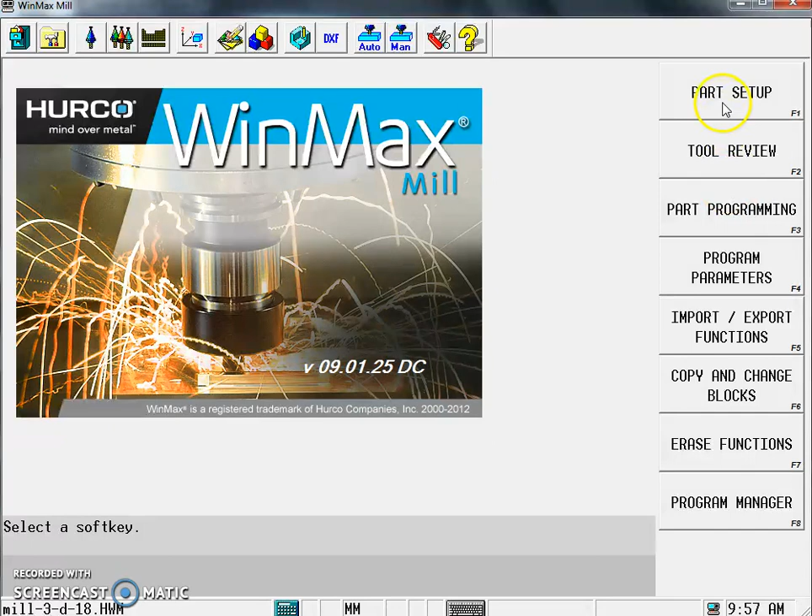Into WinMax, and first thing we do is on the input screen we can set up the stock material. So part setup, more, stock geometry, manual sizing, yes. The length of the box is 135, the Y is 70, and the Z is 40.

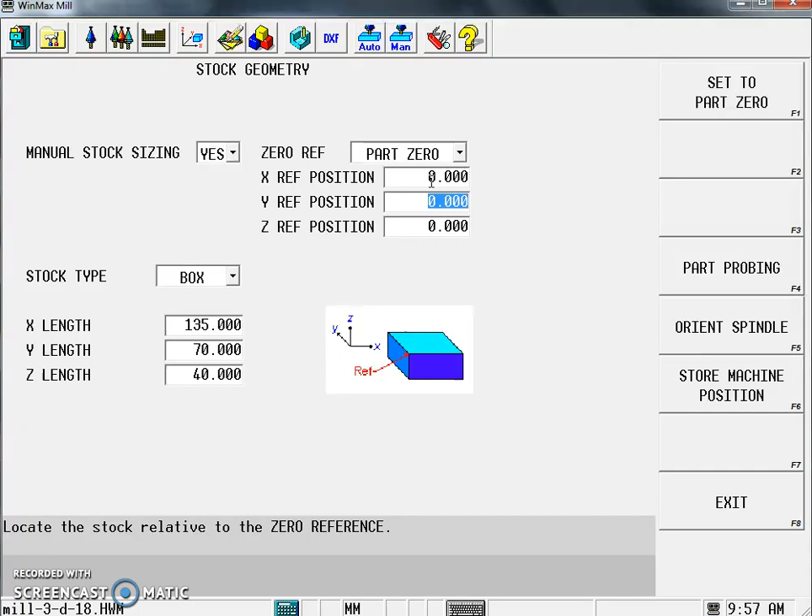So 0 editing there, minus 70, and for the Z position we're going to push that up to 32. Now we can just do a quick draw to check and see is the component stock correct. So that's the geometry there that we want for the stock.

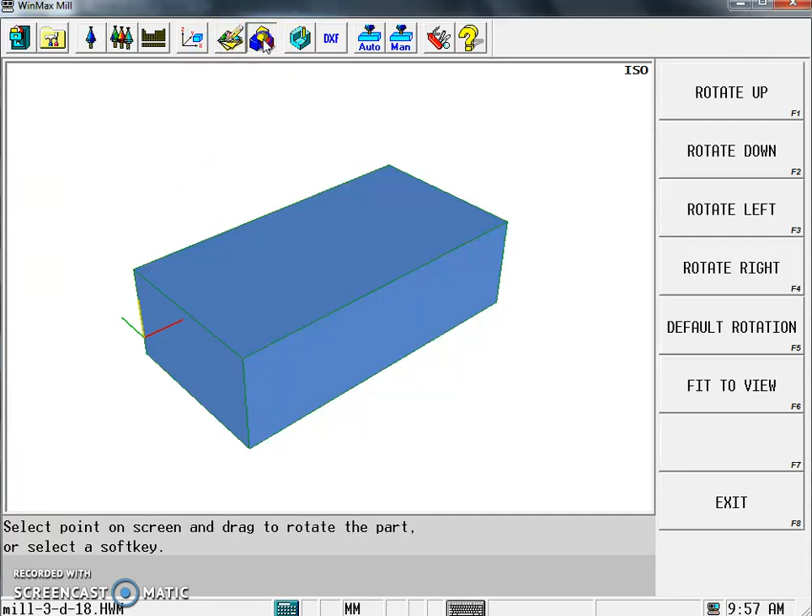Straight into the data blocks, our input screen, part programming, milling, and this time it's lines and arcs. Now our start point here, we need to take a look at our drawing. We're going to create a center point here in the part. This is our 0, 0 up in this area here, and we want to set a reference point in here, which will allow us to confirm this as the start point. Drawing this line, this clockwise arc, this line, and finishing with this clockwise arc.

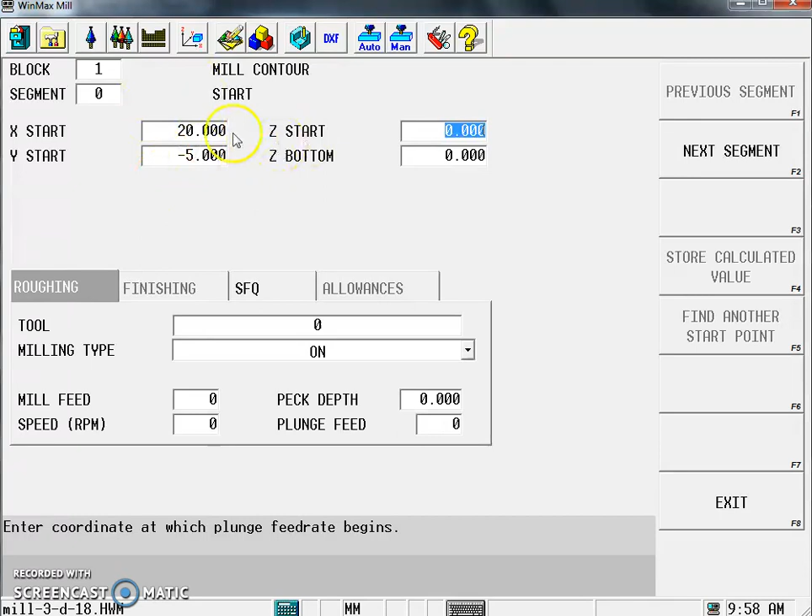So our start point from that, we'll go through it in class, but basically it's 20 minus 5, and that'll differ for different people. Our start point here is basically 30, and our start point is actually 31, and our bottom is 1.

The tool we're going to use here is an end mill, something like a diameter 16 end mill, and it's going to be a profile left. We'll go through the offsets later on and enable them. So that's our start point, that point there would equate to this corner point here. We worked this out in class, and we've given the center point here that we know.

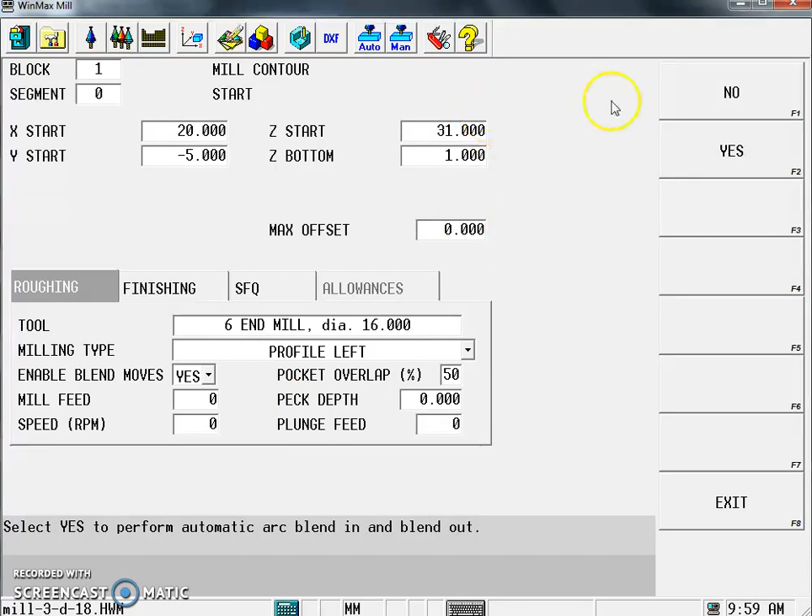Moving on, our next segment: we define a line. The X end of the line, this is our start here, our X end is basically 100 millimeters in addition to that. Where I get to 100 millimeters is the length of the bottom line here, 100 millimeters. So 120, and the Y is static. You see it calculates the length at 100 and the angle is 0, so a line straight across is 0.

We'll go on to our next segment, this time it's an arc. Our X end is basically the same as our X start, it's 120. Our Y end would be the Y start working way down. If we look at that, there's our start point of the arc, end point. We can see the block itself is 50 millimeters in depth, so it would be minus 5 plus 50, which is minus 55.

I'm going to leave the X center and Y center blank, type in 30 for the radius, and WinMax will calculate the rest. I know minus 30 is correct, so I'm happy with that, and the sweep angle is 112, which looks right. There are multiple center points, and we can click here to change that.

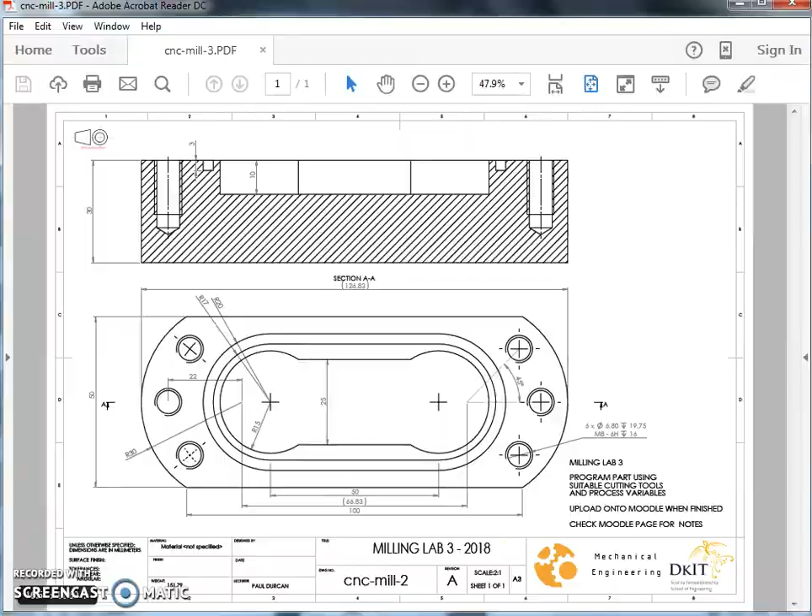If I go into my next segment, it's this line across the bottom, and because it's working back the way, we're working back to 20 millimeters. Our Y end there, I'm going to minus 55 - it should be the same as the Y start. We can see the line's 100 long and 180 degrees, which matches our drawing. 180 degrees is going in this direction and 100 millimeters long.

Our next segment is going to be an arc, same as before. This X end is the very start that we're at, and same with the Y. We leave the center blank this time because we don't definitely know them. We know the radius, and there's a similar sweep angle again.

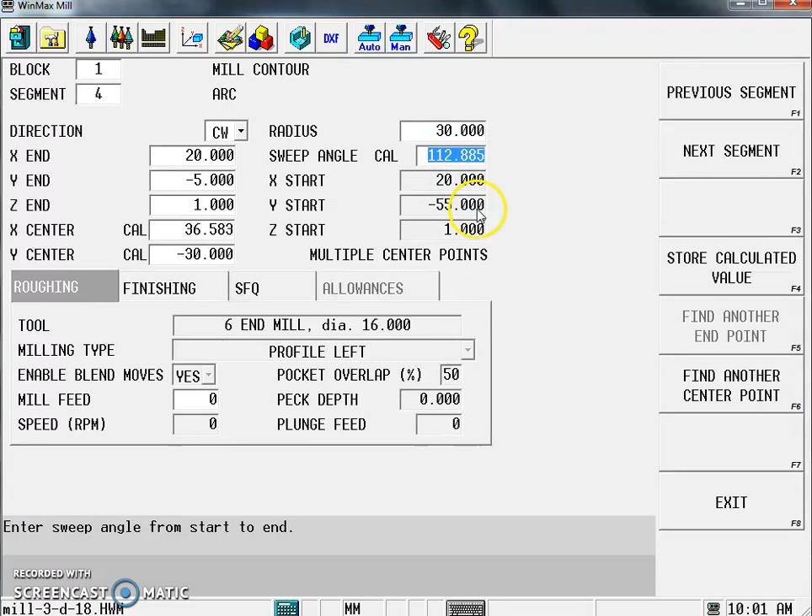So we can double check now. If we look at the blocks, we've done our line, arc, and if we just do our draw command, draw and draw, that looks okay. Let's rotate it and have a look. Okay, so that's not too bad in material.

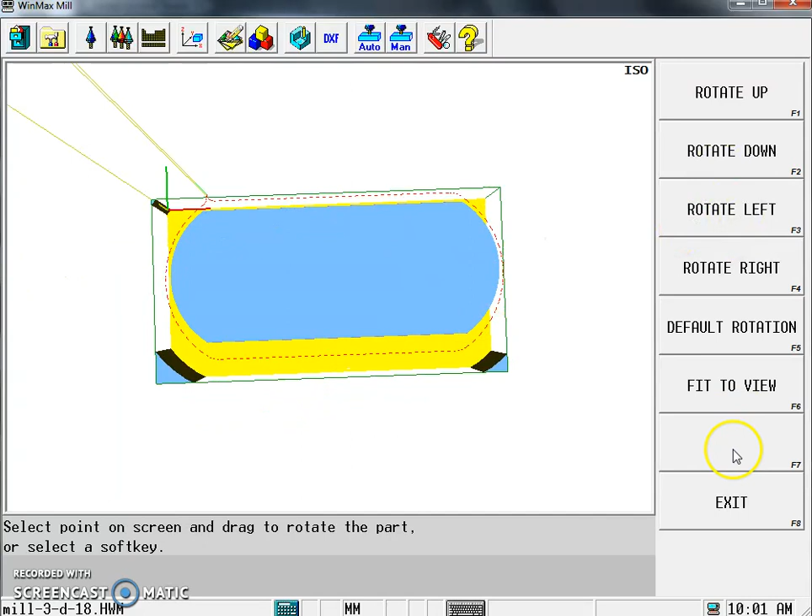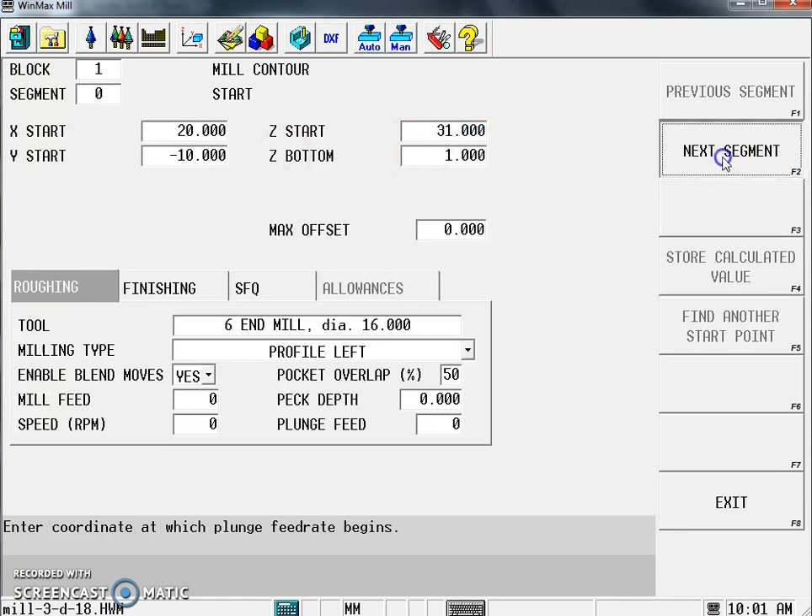We just want to make sure we machine sufficiently down the way. Now I might change my Y values here to minus 10 in order to center this in the block. So I could quickly go back and change that back to my start, my contour - instead of minus 5, I could have minus 10 everywhere. Next segment, minus 10 there, next segment that should be minus 60, next segment minus 60, next segment minus 10.

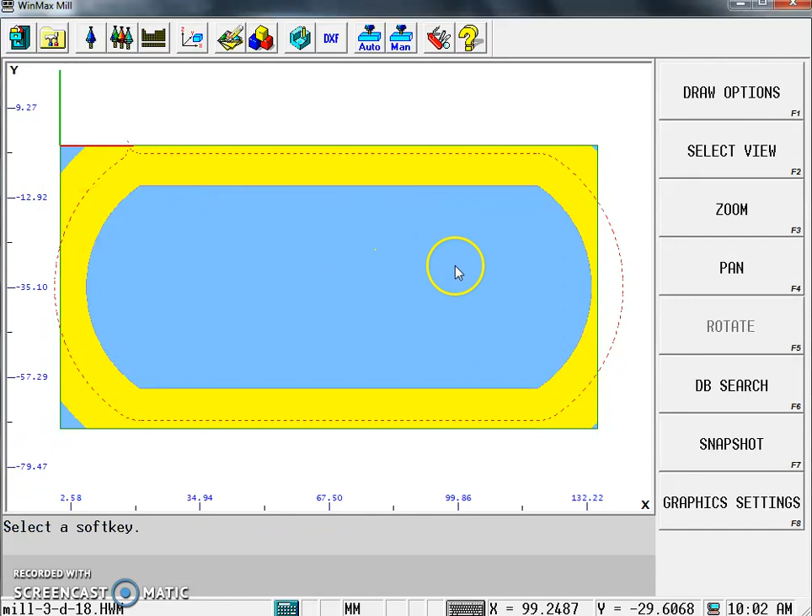So just check that work okay. Yep, so it's centered down the block, which is fine. It's not exactly centered in the Y-axis, but that's not too bad.

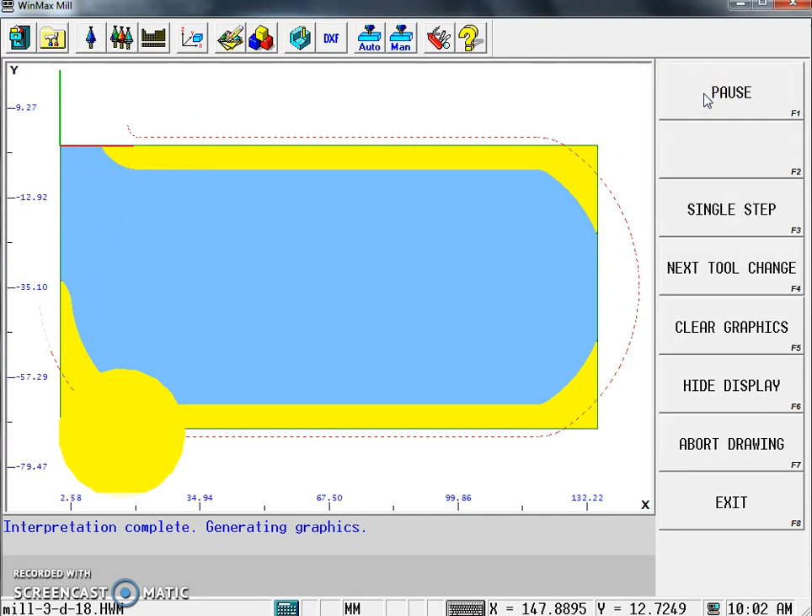So we'll go back to the data blocks here again, start on my contour, and I'm actually going to do an offset here of 12 millimeters and see what that looks like. And draw it again. You can see two paths there, and removing all the material here at the corners, which is good to go.

So that's the first lines and arcs that we're going to do, and it's a profile left as I've calculated in. We can see here there's the contour that we followed. Next video, if you follow the link, we'll deal with this pocket boundary inside, which is the exact same setup again.